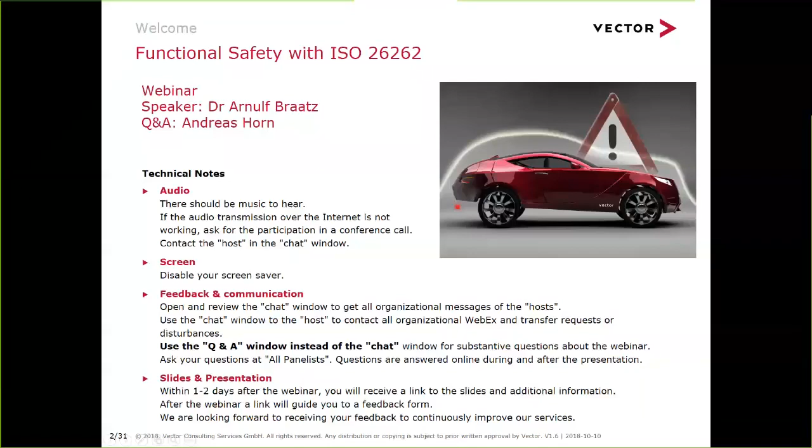Okay, but first of all, it's about showing you, by the presentation, what is functional safety in the light of ISO 26262.

I named already a few of our topics, a bit more detailed. This picture is from the beginning of this year. Every year we ask our customers what are the midterm and short-term challenges you see for your company. We gather all the answers, and that's somehow the result of the last survey we did. You see some topics form a kind of triangle here. So the all-time high, short-term as well as midterm, is the safety and security topic.

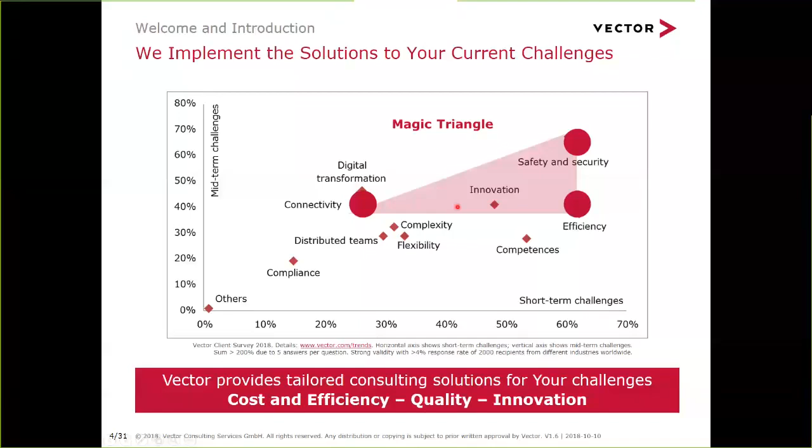So then, of course, there are still other topics around which are always there, but they are not as significant. They had not been named so often in our survey. So again, it's efficiency, connectivity, safety, and security. And that's, of course, therefore our main business currently.

So enough about what Vector is doing and Vector Consulting is doing. Let's jump into the content of functional safety. So challenges and concepts first. Of course, one generic concept.

Maybe I was too quick. So this situation is very much known, it's not so new, you see it by the timeline below. So since the late 1970s we talk about the complexity of features in the car, which typically means electronics and software features. So most new features since the 1970s are provided by electronics and not by mechanics.

So the complexity is growing, of course, because we as customers are demanding that. We want to have more and more electronics and software in our car. It started in the very beginning with motor management systems, and it continued with safety ECUs like braking, supporting braking, stability control, anti-lock system, whatever.

So classical safety systems, and it went on to more comfort functionalities like head-up displays or whatever takes place on the infotainment side, and it is still growing. So complexity is not stopping growing, it's not stopping here. The growing continues into the direction of ADAS systems, the advanced driver assistance systems, and somehow level 3 of automation.

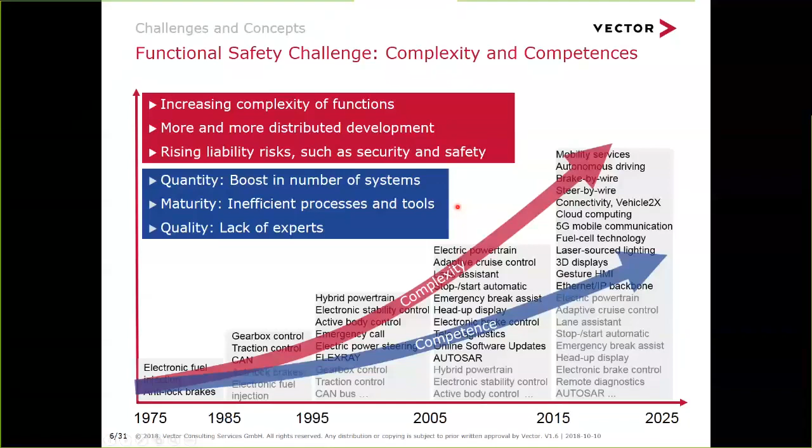And if you cannot master that growing complexity in terms of growing software and growing functions on an ECU, that means that we get safety issues more probable on our cars, and that could threaten people's life. And that is something we cannot accept, right? So that's why functional safety, as one aspect of mastering complexity, came in.

So what is functional safety about? Very simple picture here. It is about what kind of additional risk by faults can be introduced by electronics and software, which could then harm people, right? So if we talk about functional safety, we talk always about faults.

That's unfortunately the unhappy side of that part of engineering. So we don't talk about the fascinating new functionality. We talk about what could go wrong by that functionality and what that would mean to people who are in the car or around the car. So if my ESP is working well, everything is fine.

But if my ESP, my stability program on the car, does something wrong, brakes one wheel, then my car gets unstable and crashes into a tree, maybe. Or my electronic parking brake is getting loose and my car is rolling down the hill and hits into a person or whatever. So these are cases considered by functional safety, caused by electronics and software, not by mechanics.

That's outside the scope of functional safety. So it's all about limiting, of course. Everybody who's an engineer knows you cannot avoid 100% faults in electronics and software, but you can limit the probability that the fault occurs in the car, and that means to reduce the risk to somehow an acceptable level.

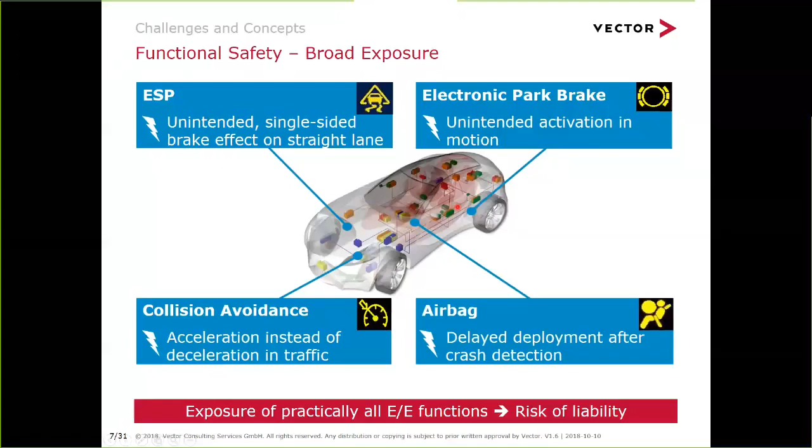And that is all about liability, right? Product liability. So that's a general rule, not only for functional safety, but a general thing for everybody who is developing cars since we have cars, let's say, that we are in charge to limit the risk for people who are using cars.

But since we have the ISO 26262, we have a very clear standard for what is accepted as a risk, and that is expressed by many, many requirements for the process and for the product itself. And you see by this picture, nearly every phase, every activity along our V development cycle is affected by functional safety.

It starts on the left side with requirements on system level, and it ends up on the right side by system testing, verification, and validation. All these activities engineers are doing to develop electronic components together with software, they are affected by functional safety. That means affected by the ISO 26262.

And also, in addition, all the management activities like project management, configuration management, all these are affected by functional safety. You see that is a life cycle-based approach. It's not just focused on testing or on requirements. It goes across everything we do in development, more or less, right?

There are areas more affected than others. That's true. So management in general is less affected than the engineering disciplines. Makes sense, because whatever makes a car safe has to take place in engineering, not in project management. But basically, all the processes are affected.

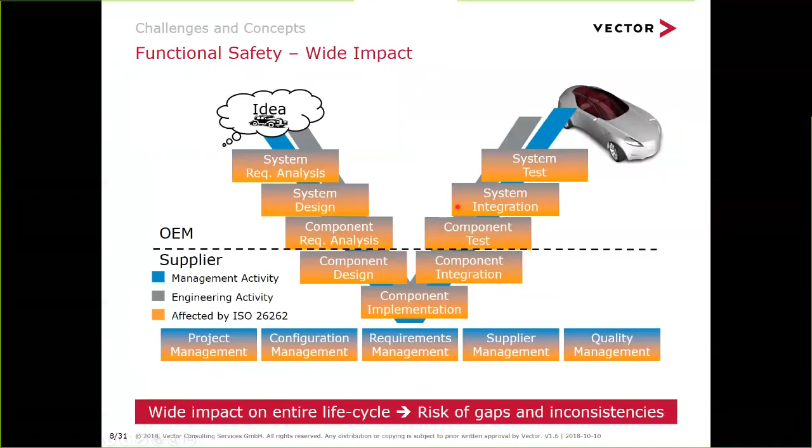And all processes are somehow in charge of limiting the risk that people are harmed by a car, or that finally a fault occurs in electronics or software inside the car. I already told you that everything is somehow about faults. So let's picture what that means.

Of course, faults and failures could occur on each level, let's say on the E/E system. It starts somewhere in the electronics, very deeply in software or hardware, and then it cascades in the general case. It cascades up to the components, to this ECU, and across the ECU, it goes into the communication system between ECUs, and then somehow cascading up, when you reach the car level, something goes wrong on the car level, which means the car does something unexpected, unforeseen, unintentional, but it unintentionally happens to the car, moving, driving, braking, steering, whatever is that reaction by a fault.

And of course, everybody can understand that if a car is at a certain speed, and it does something unexpected, people can be harmed somewhere on a parking place or on the highway or whatever, right? So that is the hazard. So whatever goes wrong on the more mechanical level, you can see it like that, which is the vehicle level. That's the hazard. That is something we want to avoid.

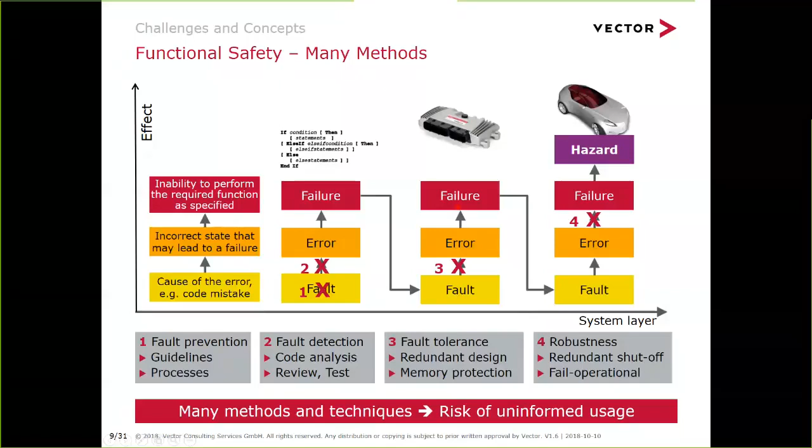So we don't consider cases like driving with a car at the pole somewhere, right? It's more in areas where we typically drive our cars. So that means there are cases that are annoying but not hazards. And of course, electronics and software has to distinguish those cases, to know whether this is a safety-related fault, or just a fault that limits my availability or comfort or whatever.

Yeah, you can see it already by everything we talked about so far. It is a complex standard, right? It affects all the processes along the V-cycle, detecting faults in all areas like software, hardware, and so on. So that sounds like there's a lot of things they have to consider. And yeah, that's true.

You see that big picture here, which shows kind of all the parts of the ISO standard. You see here 10 parts arranged around the 3 V-cycles. One V-cycle is the system-related V-cycle, and the little V's are software and hardware development V's, so that is what is expressed by the V-cycles. And you see different parts here.

So it starts on the very top level. Part 1 is a vocabulary, it defines all the terms we use. Part 2 is the management of safety, and it goes down to systems, software, hardware, and ends up finally with the guideline across safety, part 10, which is more of a guiding part. It's not really requirements providing, it's more explaining all the other 9 parts, what they mean.

So if someone of you wants to start reading the ISO standard, I would recommend to start with part 10. Don't start with part 1, it's a bit annoying to read just terms. That's the reason behind it.

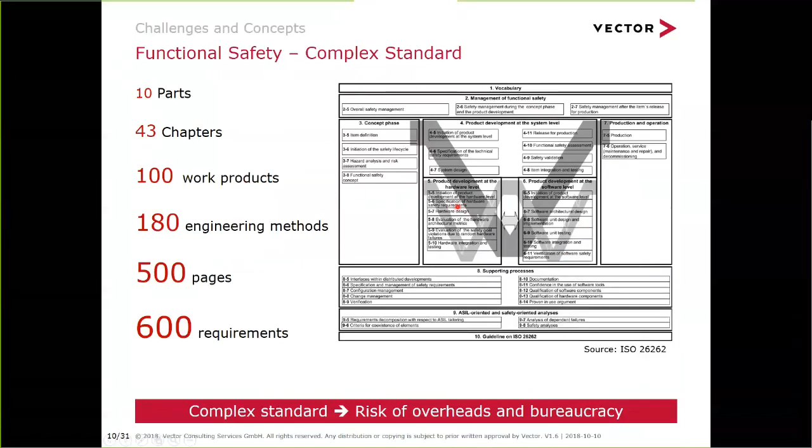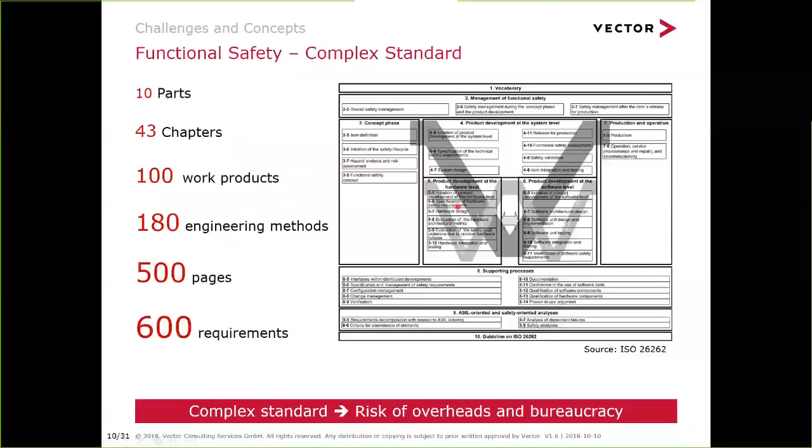And of course, maybe you see why that is consultancy business. If someone just sits down and reads all the stuff here and tries to make his own picture out of that, and tries to make a process for his project or his company out of it, the risk is very high that you misunderstand, or that you just formally understand the ISO standard, and you end up with a bunch of bureaucracy and without any value for safety, right? Just formally doing something. So, and of course, that's why consultants are in the business. People who not only have read the standard, they know how it's applied and can support you in that.

Yeah, not to forget that. Maybe some of you already know that, and maybe waiting for some news about that. I don't know. So maybe for those of you who are more familiar with safety already, they know that since months there's a new edition announced from the ISO committee.

It's still the ISO 26262, but it's called the 2nd edition, or the 2018 edition, which is obviously the 2nd edition. So what we have shown you so far is all about the 1st edition, and now we are waiting for the 2nd edition. It was announced for already March this year, and still it's not there. We'll come to that at the end of this webinar in more detail.

But basically the basic information here is still we're waiting for the final version. Some in-between versions are out, but the final version is still under release, so we are waiting for that version every day. But maybe to give you kind of an outlook of what is upcoming there in terms of new content.

Yeah, the most obvious things are we will have 2 new parts, so part 11 and part 12 are new compared to the 1st edition.

Part 11 is a non-requirement part, so it's just informative. It's a kind of addition to part 5, and it explains the safetiness or the requirements for safety engineering for the hardware level, specifically for those who are developing ASICs and different complex semiconductors or microcontrollers and stuff like that, which are really complex now and not just simple hardware parts. So they need some further explanations of what is expected from the safety point of view, and that is laid down in part 11.

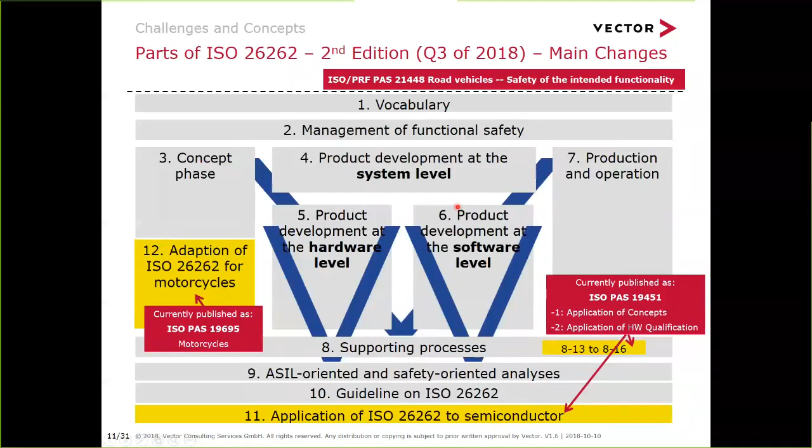Of course, there will be much more changes on a more detailed level on each part of the ISO standard - more clarifications, more appendixes, more methods explained. Most of it is about explaining, for those reading the ISO standard, more out of practice what we have learned in the last 6 or 7 years by applying the 1st edition. It's not about inventing safety in a new way or presenting a new kind of safety. It's more about explaining it better, more precisely, what we really expect from the people developing products in the area of functional safety.

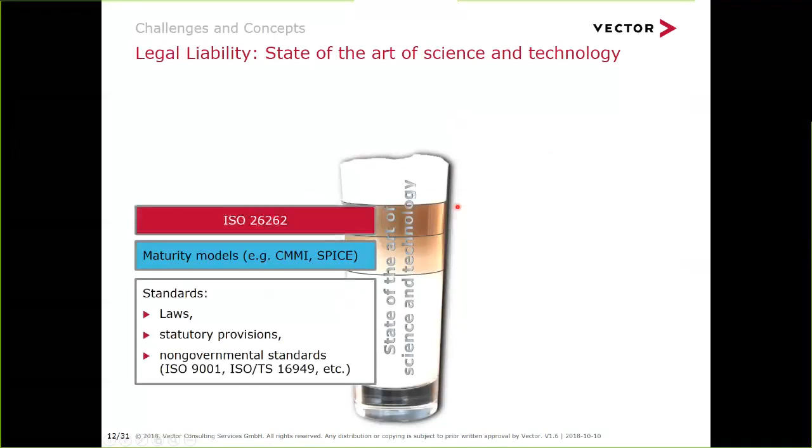Not to forget that ISO is, of course, just one standard out of many we apply in the automotive industry. Just to touch a bit the liability question, which is always around with safety - safety is not a specific standard concerning product liability, it's just one out of many.

You see that kind of layered model here on this slide. So below ISO there are other models like SPICE, or there are laws, there are lower level standards like ISO 9001 or 16949 and other standards we know also in the automobile industry. So it's not that safety has changed something concerning liability.

It's more that the safety standard ISO 26262 made it more obvious now, more clear, what is expected as state-of-the-art of science and technology. So if some company comes into a legal case, it's more clear what is the benchmark concerning safety. It's not about what other companies are doing, it's more what is written down in the ISO standard, because now the industry has a very dedicated industrial standard, and so everybody can read it. So if you like, somehow there are no excuses anymore for nobody not to regard safety in development.

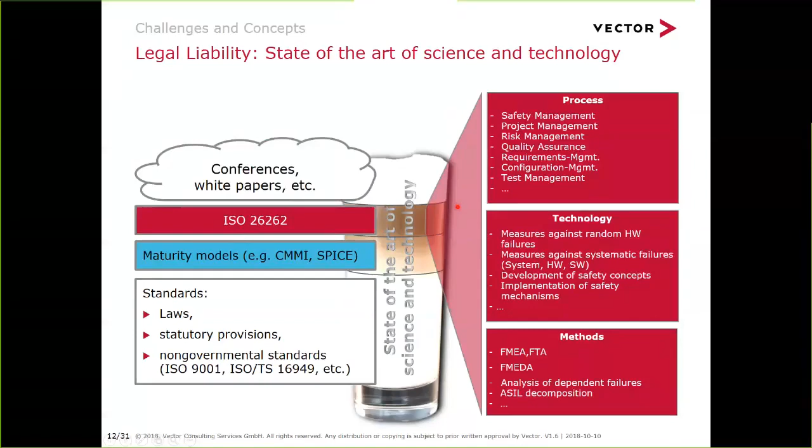That's the impact of the ISO standard - it's not that liability has increased. That is always around: if your product is harming people, you're always in a critical situation concerning liability, whatever standard is around. So the standard just makes transparent what is expected. You see some examples here on the right side concerning processes and methods, what we would expect from a company who is in the functional safety business.

I mentioned already the ASIL, which is a very important concept of ISO. Just a short description: it is all about that we have a tolerated risk level with what we accept by malfunctions in the car, and of course by people getting harmed by a car or by a fault occurring inside the car. But of course, by each new function you put in your EE system, you basically increase the risk - that's the view of ASIL.

So it's not just that you put a new function in, you increase the risk that the function goes wrong and somebody gets hurt. So what we do by safety is somehow to reduce that risk level again, back to what we can accept as a kind of residual risk which should be below the tolerated risk. The calculation is quite simple, as we know it from other risk-based approaches - it is always a product out of severity and probability.

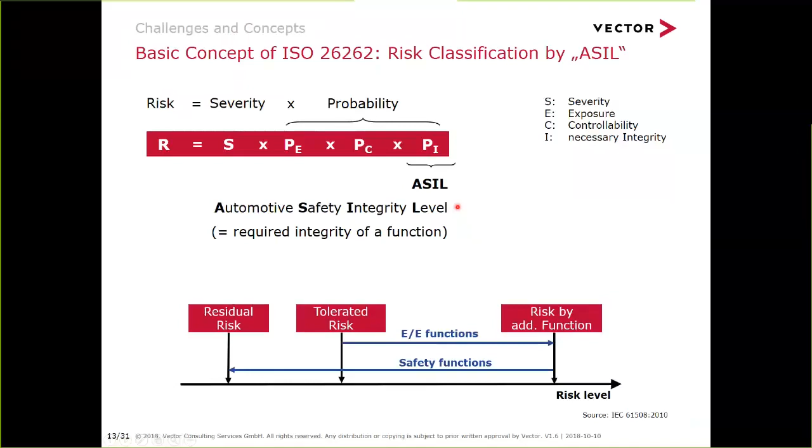There are ASIL A, B, C, D. Maybe some of you already heard about that. We have dedicated stages, just 4 stages, and all these stages define somehow the kind of allowness to fail. So on ASIL A, I have more allowness to fail as an ECU, and on ASIL D, I have a limited allowness and more quality. Finally, everything comes down to integrity being a quality measure - the less failures are allowed, the higher is my quality. So ASIL is a quality measure, very much focused on faults which could end up in a hazard.

That is the automotive safety integrity level, which is very important and the most important concept in an ISO. Out of those ASIL, we get a lot of recommendations and requirements out of ISO.

So if you are at that ASIL, you have to do this on your product side - that's a gray box. You have to do something in terms of increasing the level of diagnostics, implement some self-tests in certain places, set up a good architecture which separates software components and hardware components from each other so that faults cannot cascade somehow, and stuff like that. Maybe also redundancy is a topic here, it depends on the ASIL. That's on the product side.

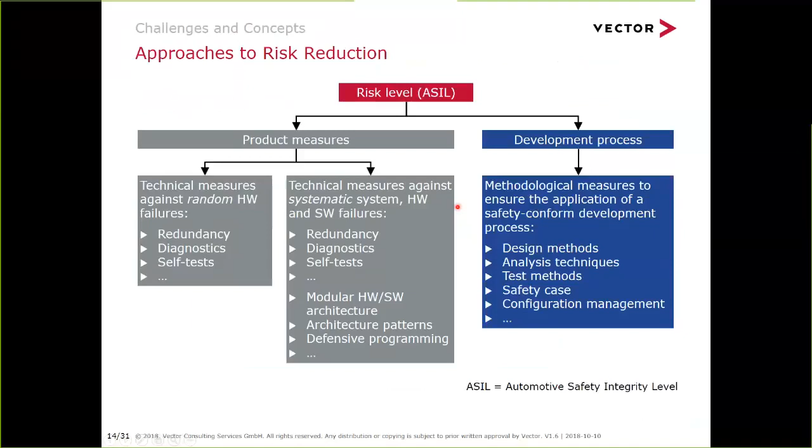And also we have requirements and recommendations on the process side - to apply methods, for instance traceability of requirements, to apply safety analysis methods like FMEA or stuff like that, but also management things like you have to have a safety plan, you have to provide a safety case, and stuff like that. That all depends on what ASIL I have. So some of the requirements are the same for all ASILs, and some have to be distinguished.

I mentioned already that the ASIL is somehow calculated by a lookup table. So what you see here is a very simple example of how that could look. It's a kind of table where you start on the left side and look at one function or feature of your car, which could be here, a kind of braking function. Then you go through different failure modes - oh, there's no braking effect, there's unexpected braking so suddenly the car brakes, or there's asymmetric braking, so both wheels are braked independently with different torques. That could lead to a specific situation - you're driving at high speed, above 100 kilometers per hour, on a wet road or whatever, that makes your situation.

Based on this information, you take your lookup table and think about how often I'm in such a situation - wet road, highway, driving at high speed - that is maybe E3, which is comparable to likely in the ISO context. Then you think about how good is the situation controllable by a driver - that is C3, comparable to hard to control. And then you ask, what can happen? Some serious hazard can happen if you're at high speed on a wet road and no braking effect takes place - you bump into something, that could threaten your life. High severity. And that leads to an ASIL C, in this case.

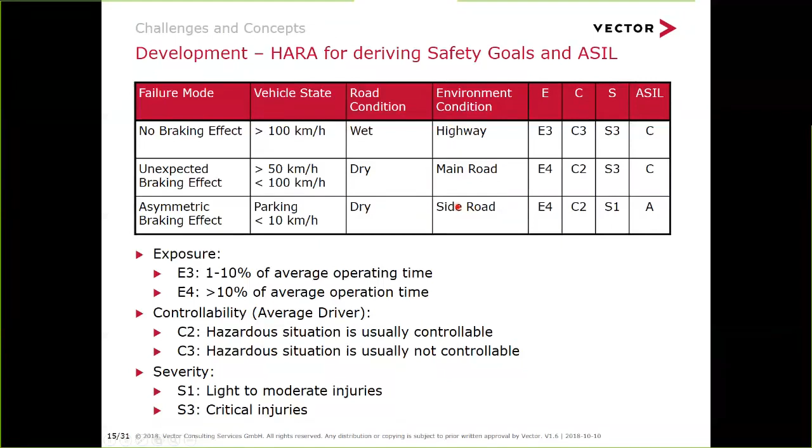So with this kind of approach, you go through all your functions and consider all the situations which make sense, and then you find out the highest ASIL for your function. And of course, not just the ASIL - it also needs a safety goal behind it, which is assigned to your ASIL. So the goal states, as a requirement, what needs to be avoided with which level of ASIL.

Another important concept in the ISO is the fail-safe and fail-operational concepts. That means in many cases we can afford to just shut off our functionality in cases where we have a fault. That's the easiest approach for those caring about functional safety.

So you find some deviation in your ADC, you measure some strange values on the CAN bus or whatever, and the first thing you do is shut off my ECU. I go into standby and maintain standby because my functionality is not needed for driving. It is just strange currently, and it's better to switch off, so I cannot harm anybody.

Maybe I lose some functionality, some comfort, or some availability of functionality, but I can still drive, steer, and brake my car. So in those cases, fail-safe is a good concept to react to a fault in your ECU.

But the more we talk about higher sophisticated concepts found in autonomous driving on level 3, 4, and 5, the more we cannot just switch off. Think about really driving autonomously on a highway: you switch on your highway assistant, you're laying back as a driver, looking out the window, not focused on the traffic around. So suddenly your autonomous driving function is not working anymore because some fault occurs. Then fail-safe is not a good solution.

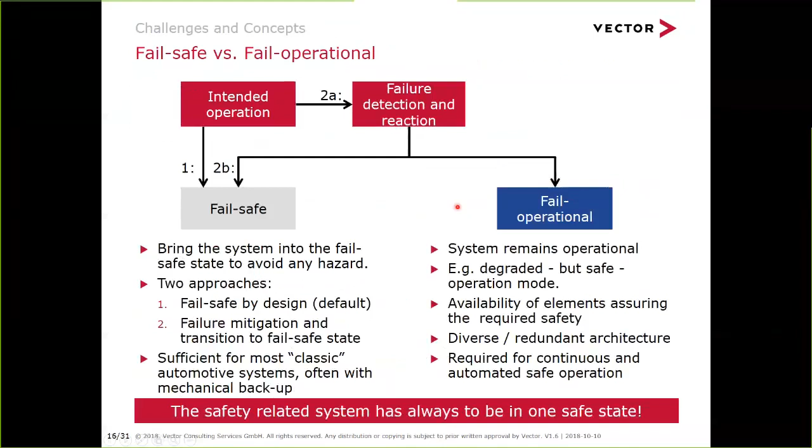Or you have a second system that kicks in if the first system is somehow compromised. That is a kind of complete redundant solution - a second controller or a second sensor can replace the one with a fault. That shows the fail-operational concept is much more complex than the fail-safe concept. It is quite easy compared to fail-operational, because just switching off is easier than thinking about what could be a redundant solution.

Out of goals, we get functional safety requirements, which is a level below. Out of functional safety requirements, you get more technical safety requirements, and further cascading down we would get software and hardware requirements, and on the right side of the V cycle we impact the test specification. So traceability of requirements is very important.

It's anyway important in non-safety areas too, no doubt about that, but here you see it because the ASIL always follows the flow of requirements. There's no independent flow of ASILs independent from the requirements. So if you want to assign ASIL to something in your system, it is always done through requirements. That means if you lose the traceability, you lose the ASIL, right? That makes traceability of requirements so important for functional safety.

And of course, if someone says this component is an ASIL A component, as an example, that's basically wrong. There are no ASIL A components. There are only ASIL A or whatever ASIL requirements. If they are allocated to a component, then of course that component is somehow an ASIL A component. That's true, but to be very precise, the ASIL is only assigned to requirements.

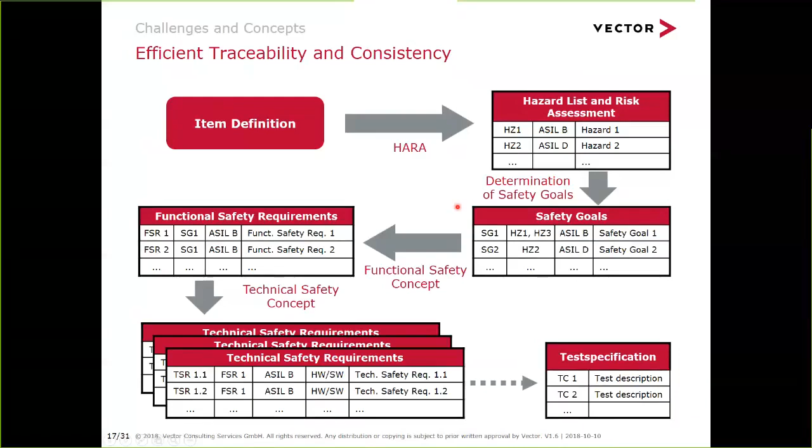But of course, the effect of the ASIL is then also visible on the component side. That's true, so it's not wrong to say this sensor is an ASIL B sensor. But we have to be very clear about what that really means: there's at least one requirement with ASIL B allocated to this sensor.

Another important concept is safety analysis. Along the entire V cycle, basically we have three levels of safety analysis: one is on system level, one is on hardware level, and one is on software level.

So that means, obviously, safety analysis is a very important thing. Safety analysis maybe sounds a bit unusual or a bit high level. What does that really mean?

If you look into what is done in practice, and also what is noted down in the ISO standard as example, basically it means FMEA or FTA is applied. The failure modes and effects analysis, FMEA, is a well-known method already in the automobile industry. It's not new, but it's emphasized and requested again by the functional safety standard ISO 26262. Same applies to the FTA, the fault tree analysis, which is also basically known, but I don't know how often it is applied.

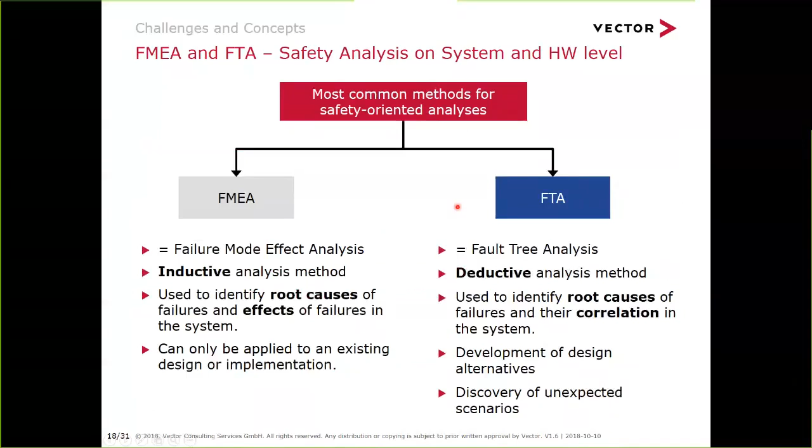If you jump into the practical side, maybe we know these methods in the automobile industry, but whether we really apply them in all our projects, that's something I doubt. I've seen so many cases where it's not done, even if it's written in the company's processes. So safety puts a new emphasis on FMEA and FTA on system, software, and hardware level.

Okay, that's a quick run through the basic challenges and concepts of functional safety. Of course, it's not the complete picture about everything in the safety standard, because many hundred pages are written about that. But I think it shows the most important concepts.

I hope it also shows that functional safety is not something out of the academic world, something very speculative, very sophisticated and far away from what we are doing today in the industry. It's very close to what we know in the automobile industry, concerning methods, development processes, and what makes your product reliable. So there isn't really something new, but by putting it into an industrial standard and requesting it from each development project, it puts a new emphasis on things we have known before but not really consistently applied.

So it's time for a little break before we move on with the vector safety experience and more practical hints. I would like to hand over to my colleague Andreas, because while I was talking about functional safety, he tried his best, and I saw him typing to answer all your questions. I still think there are open questions, but I think it's time to summarize maybe the 2 or 3 most often asked questions, so we get a feeling of what's around. Maybe we can help by providing representative answers before we continue with the slides we have prepared. I'd like to hand over to Andreas, who maybe has a few interesting answers for you.

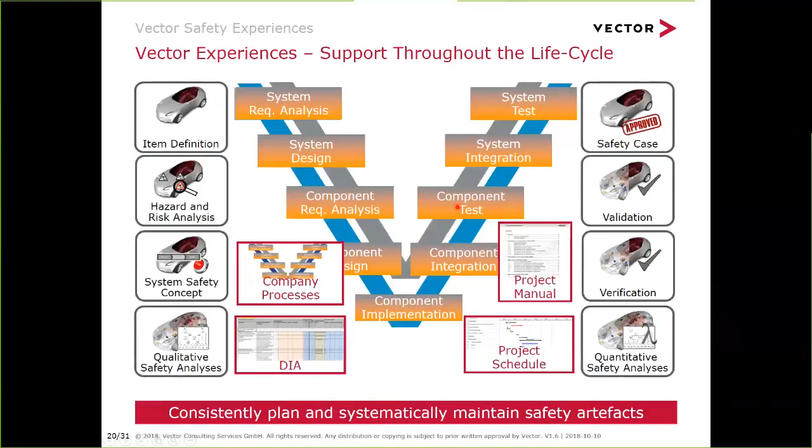So again, it is a life cycle thing, functional safety, and somehow that means you need a plan across your life cycle. What are my work products on each level? What do I need across the V cycles - the systems V cycle, and also hardware and software cycle, wherever you are?

So I have to plan for my - so you see here a few examples of typical work products out of safety, right? Like the item definition, which is the ECU and the sensors and actuators. Then what we have already discussed, the hazard and risk analysis, that's the HARA - this is all a document, right? Also the safety concept, the validation plan, and finally what you deliver to your customer in terms of the summary of all your documents and measures you have applied for reaching, confirming, or complying with your safety goals. That is then laid down in a safety case.

So all these documents, they need to be planned, and they take effort, they have requirements to fulfill, so we have to plan for it. You have to plan not only for the when and the effort, but also for who's doing that and who has the right skill to create that document, because the documents are not just there.

You see it with a lot of technical documents - it's not just about writing something down. It's of course about reflecting what we have done on the product side, right? So it's not just about writing a paper called Hazard and Risk Analysis. There are requirements coming out of that. They have to be allocated to pieces of your component, or your ECU, sensor, or actuator, or whatever you are responsible for in the area of EE systems. All the requirements are going into that - they're not going only into the process side.

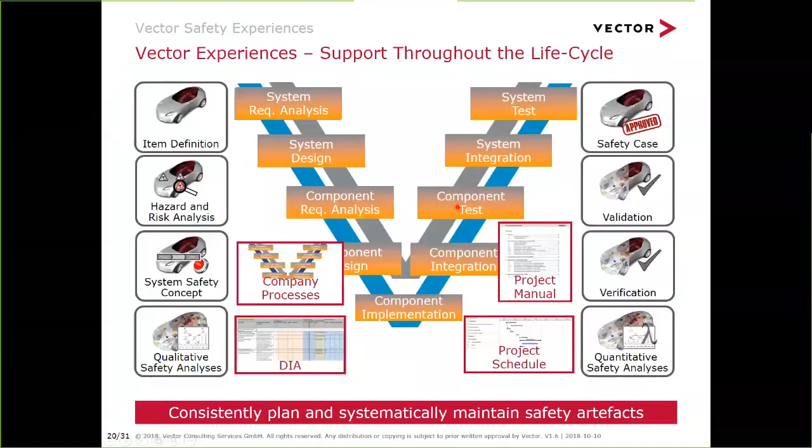Again, of course, the ISO standard itself has lots of requirements from the process side - that's true. But what we do in the HARA, the safety concept, and the safety analysis, that is not just a process thing. It creates measures, mechanisms, requirements which go into the product itself. Because, of course, what finally makes the car safe is not the paper outside - it is the software and electronics, how it's designed and implemented in the car. That saves lives. The paper cannot save lives, right? The paper is just a means to assure that everything is done on the product side.

Okay, that is one very basic best practice out of what we have seen. Second thing is, of course, we already heard that a lot of safety analysis has to be applied for functional safety on many levels.

If you have to deal with requirements, architecture, and analysis in terms of tools and documents, that is a complex thing, right? You have to deal with many different documents. If you do it with Excel, then you have a lot of spreadsheets flying around in your project representing requirements, architecture, and the FMEA or whatever.

That makes life very hard if you have to change something, because you have to change related information in each of these documents, and it's very tough and effort-consuming. Integrated tools help us to keep the data in one place. So if you change a requirement, you see it immediately in the architecture, what has changed, and you can align your architecture according to the changed requirement.

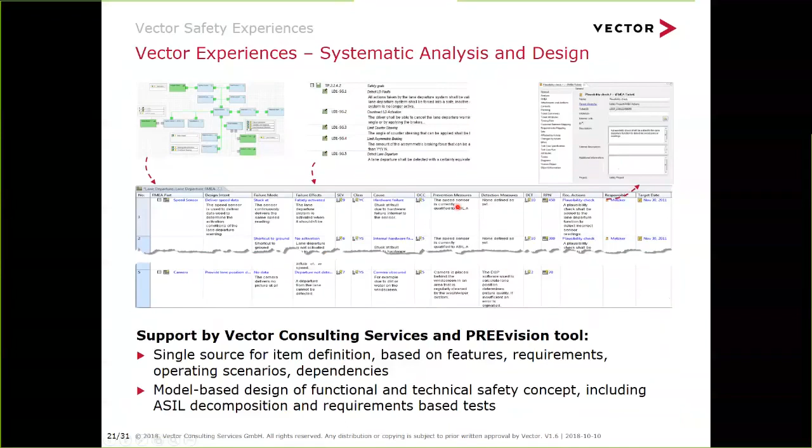And also you see it in the FMEA - oh, we have a new function here, so we have to cover that function by safety analysis. A few rows have to be written concerning failure modes or whatever. That is a big help for those dealing with changes in projects, and changes are always on in development projects. Maybe not in the beginning, but starting somewhere after, changes come in, and you have to maintain your data according to those changes, and that can really kill a project.

So that is also a more general thing. It's also helping in safety. Use sufficient, appropriate tools for that.

Another important thing in practice is that ISO 26262 has no idea, let's say, or no definition about interfaces between companies. There's nothing written like, from the ISO point of view, the OEM has this task and the tier 1 has this task. That you find nowhere in the ISO. You just find the concept that there are different companies working on the same item, and there are interfaces between companies, that's true.

And the only thing you have to do is cover these interfaces with a document we call DIA, the Development Interface Agreement. I'll come to that in a second on the next slide, how that could look like. But that is the only approach provided by the ISO.

The ISO is not ignoring that fact, but there's not so much help on how that shall be done, because consider the case: an OEM has done the HARA, found some goals, and provides the safety goals to his supplier, but the supplier says, oh, I have a different HARA on my side, different goals or different ASILs, so I don't agree with the OEM's HARA. That needs to somehow resolve a natural conflict.

There's nothing said from the ISO point of view, but from vector's point of view, we would recommend such interfaces should not only be covered by an agreement, an interface agreement, but in addition, as much as possible, provide joint workshops for the HARA, for FMEA, for FTA, to bring people on both sides together in one session, so you don't produce too many discussions and different understandings along interfaces between organizations. Do things together, and that helps a lot to be efficient, and efficiency is always a measure to avoid faults on the process side.

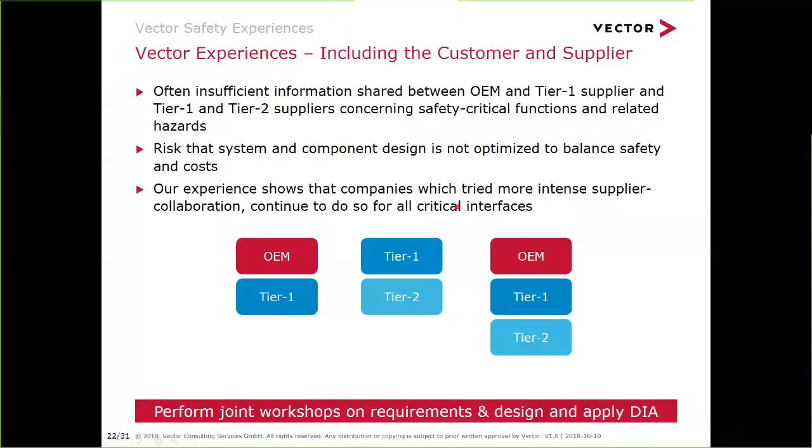If it's about having lots of discussions between an OEM, for instance, and a tier one, that means sooner or later you get many changes, and that could lead to some faults. You oversee something, a changing requirement or whatever. So from the safety point of view, that is also critical. Efficiency always means fewer faults, not so error-prone as lots of discussions going on. It's always unclear what is the current status of agreements and stuff like that.

A DIA, just to give you an example how such a document looks like, is not kind of rocket science, to put it like this. It's a list of documents.

You find here on the left side the definition of the ISO, what work products are expected by ISO. It starts with software architectural design, a very general document expected by ISO, then a short explanation in the next column. Then you see two sections, the red and the blue, which say this document is done with this name and this responsible person by tier one, maybe, or by one party of the interface, and the blue side is the second party. This is what we're doing, that is what you're doing, so to have an agreement on who is doing which documents so that we don't miss anything requested by ISO 26262.

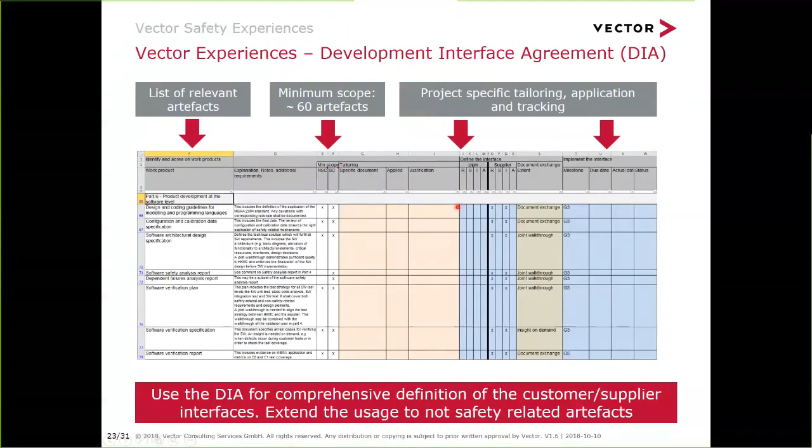And in addition, you find typically in column S a kind of procedure for how we deal with such documents, whether we provide the document as an exchanged format, so we regularly exchange documents, or we just do a joint review, so it's still owned by us but you can review it, or it's just shown in the audit. So that can also be defined here. That's not so much ISO related, it's more a best practice, that this not only defines the names of documents fulfilling ISO requirements, it also defines how we deal with those requirements, who is doing what on both sides.

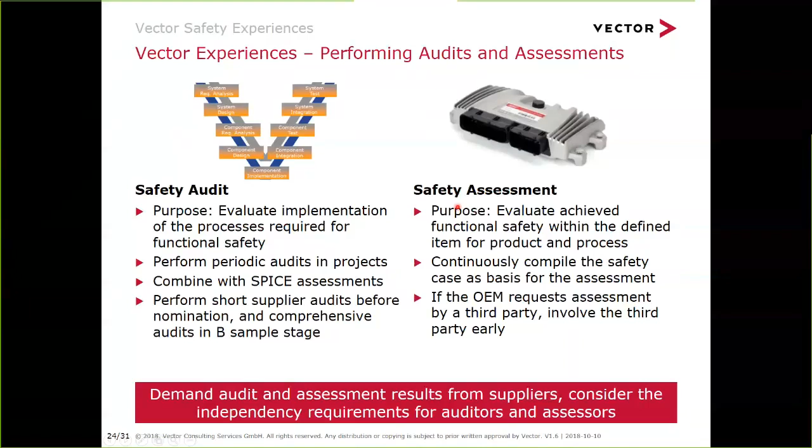So for really releasing your product, which is ASIL C or D, you have to do an assessment, finally at least one. But that is not a certification, you do not get a kind of certificate or stamp on it. It's just an assessment, and according to the requirements of ISO, somebody or a team sits down and checks all the requirements from ISO to see if they are fulfilled by your component or your ECU, whatever you're responsible for. So that is expected, but there's no certificate for that.

Maybe one of the last statements, according to practical experience, I mentioned it already in the beginning: security always comes up when safety comes up, let's say since a few years. In the beginning it was very much separated, but the more we have connected cars, it's growing more and more. It starts already with Bluetooth to my app on my phone, it goes further with wireless LAN around my car, where I can use my car as a hotspot, and it ends up with OTA features, the over-the-air software updates on our car.

So that's the thing. It's currently growing, and it's already developed for many cars, piece by piece coming into the car. That makes security a more and more growing thing, because now the attack surface of the car is growing, right? More and more connectivity points are at the car. So that means security comes up.

We could keep it separate from safety, because it's another thing, right? How much my car is threatened by security attacks. But of course, if you attack a car, if you found a way into a car by whatever kind of vulnerability, then you can also tamper or manipulate safety-related functions - for instance, the steering ECU or the braking ECU. And then you enter the area of safety. So that is one of the reasons why safety and security are always named together more and more, because they have a strong relationship on the negative side. We try to avoid that impact of security into functional safety. But to avoid that, both topics are moving together, in one spot.

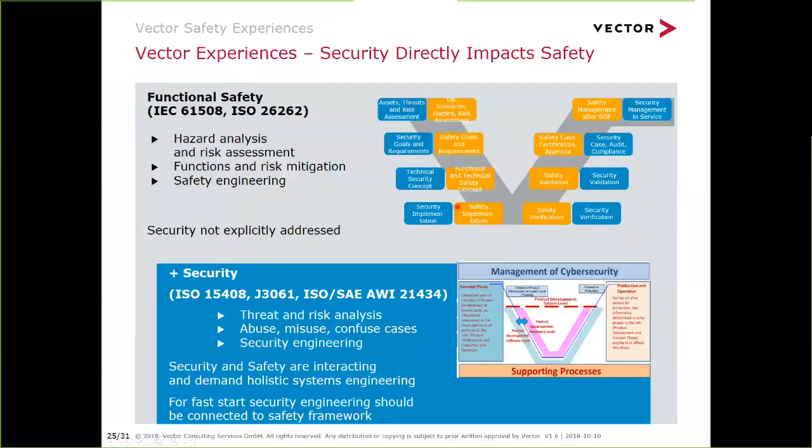Safety is much more mature because there are released standards out which are required to be applied in the industry. And that's not true for security - there we have a more blurry situation. A few papers are written, a few in-between versions of standards are out, but there's nothing out in terms of a released and published version of an industry standard.

Okay, a bit of conclusion and also a bit of outlook. To start at the very beginning, it is all about growing complexity, more and more functionality, and that drives a lot of problems, let's say. It also drives a lot of interesting things on the other side, that's true. But from a safety point of view, we look more to the problematic side - we see that by growing functional complexity, many companies are a bit overwhelmed.

Overwhelmed by what has to be done in terms of methods, what has to be assured, what tools have to be used, what method has to be applied. That is really driving companies, bigger companies and smaller companies. Whatever you do - even if you just produce a sensor for whatever kind of ECU in the car - you are affected by functional safety, because the sensor is of course a piece of hardware with a piece of software on it, so you are in the light of functional safety, right? So that is something you have to care for - independent audits and assessments, of course.

Of course, not to forget, it's not just a standard out there - more and more you get also components and products out of the safety area, like special microcontrollers which are maybe called safety controllers or something like that. They provide special safety mechanisms. You get software like you get from Vector, like the Safe AUTOSAR. So you get more and more also components you buy some safety with. But of course you cannot free yourself from following the ISO just by buying a piece of software - not to put it like that. But it helps you to fulfill functional safety if you buy components for your ECU, hardware and software components which already provide you a quantity of functional safety. There's no doubt about that. But still we see also in industry, lots of things have to be explained.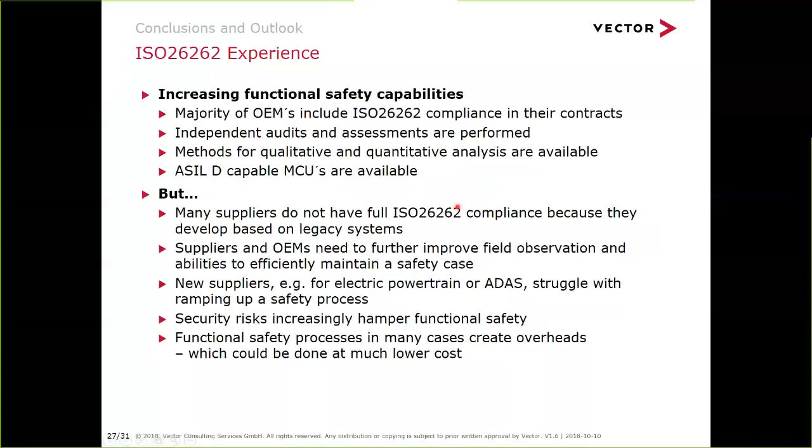So there's a lot of improvement to be done, and it's something which drives our business. And of course, not to forget, by all the changes I mentioned in the beginning, electrical driving, connectivity, ADAS, we get more and more new companies coming in from different areas of electronics and software, non-automotive areas, entering the automotive industry, and they also need help understanding what is different here from the consumer electronics areas they know from their other products. So there's a lot of differences, and ISO 26262 is one of the biggest differences here.

We have a lot of appendices in the ISO standards, like new methods which are not required but should help to better understand the area, for instance, of safety analysis. We have a lot of new, or better explained, methods there. So it's not just a few more notes in it. There are some new chapters we haven't seen before, but they don't change the meaning of the ISO. They provide more opportunities for how it can be applied, like DFA, dependent failure analysis, and FMEA and FTA. There are more and more supports in the ISO standards for how it can be applied, how it can be efficiently applied, not just applied.

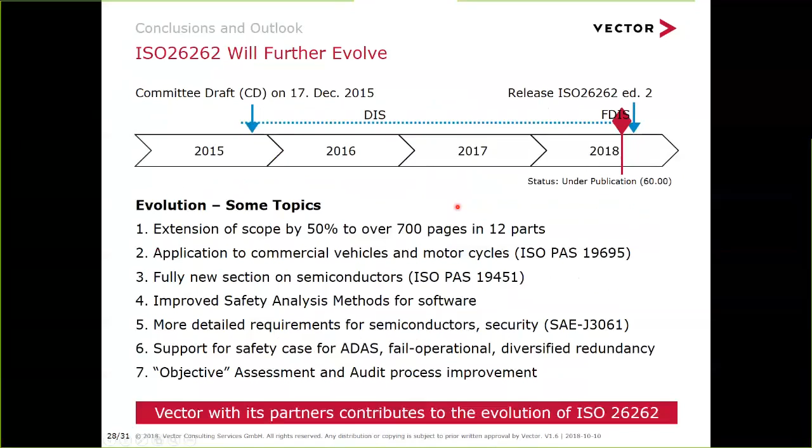So you see there's a lot of interesting stuff upcoming, but no one dares currently to say exactly what is in, because the in-between versions have changed from one to the other. The working group working on the final version knows what's in, but outside that working group we have to be careful about announcing anything. We simply have to wait until we get the final version, and then we will know, at each level of detail, what has changed. The most obvious changes have already been mentioned here.